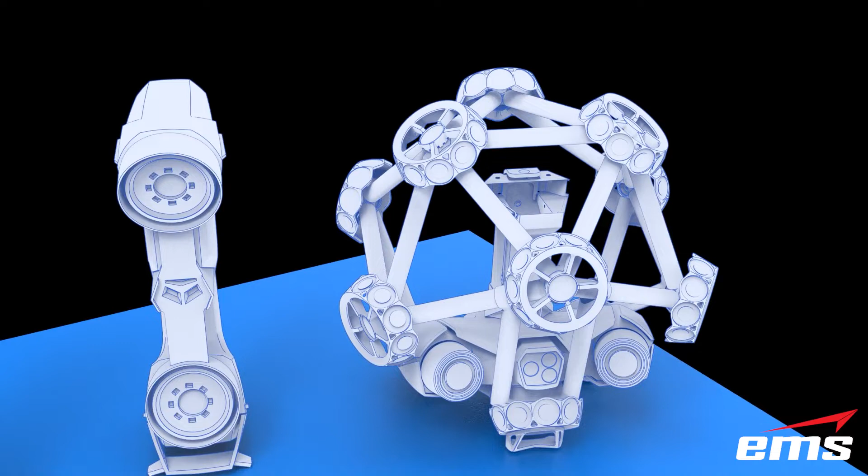In this video, we are going to compare 5 3D scanners from Creaform. As of 2021, this is the current lineup of Creaform's handheld 3D scanners.

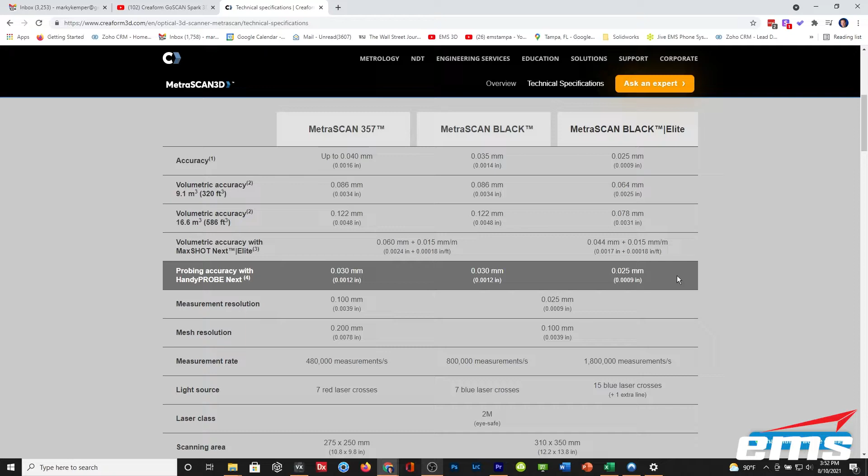The 5 scanners are the Peel 2 3D scanner, the HandySCAN 700, the GoSCAN Spark, the HandySCAN Black, and finally, the MetraSCAN Black. Now, something to mention is some of these scanners have additional models that we are not going to discuss today. For example, the MetraSCAN has the Black Elite and the 357. We are testing the top-of-the-line system for each model.

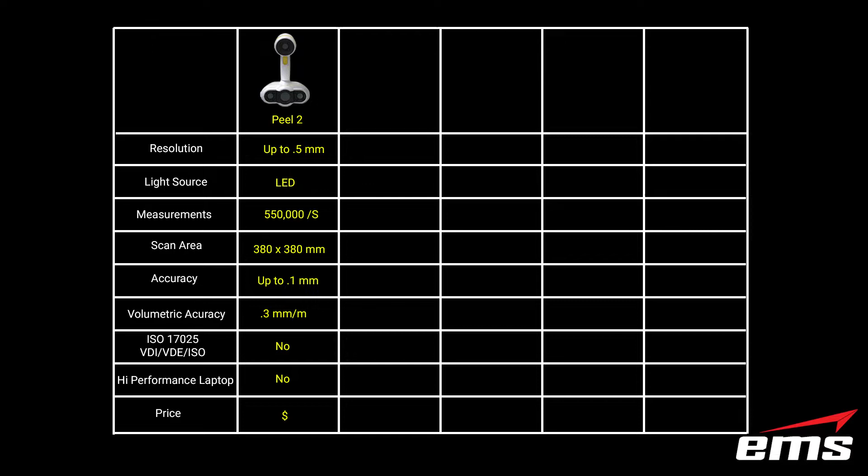Next up is, is a high-performance laptop required? No, you still want a good laptop, but some of these scanners have very specific graphics cards, processors that you need to use. Basically we're saying you don't need that here. You still want a good computer, but it doesn't need to be very specific, very high-end. And as far as price, we're not going to get into specific pricing because it varies from country to country and prices can change over time. So let's just say that this is the most affordable in the shootout here, and we've kind of put them in order by price, so that should give you some ideas. So that's the Peel 2.

Now next up is the HandySCAN 700. Its resolution, again mesh density, will go down to 0.2 millimeters. And this gets into the feature size, how small of a feature the scanner can pick up and resolve, as I've mentioned earlier.

The light source is red laser lights, and the HandySCAN 700 has 14 laser lines in a cross-hatch pattern. It also has a single line mode to get into fine detail, small holes, and narrow crevices. Again, if you want to see a lot of detail on that, go watch the demo videos.

The measurement rate is a little bit less at 480,000 points per second, and the scan area is slightly smaller at 275 by 250 millimeters. The accuracy is 0.03, or 30 microns. Again, that's your point-to-point accuracy in a given area. Your volumetric accuracy, as you scan something larger, is 60 microns over a meter. That's your stacking error.

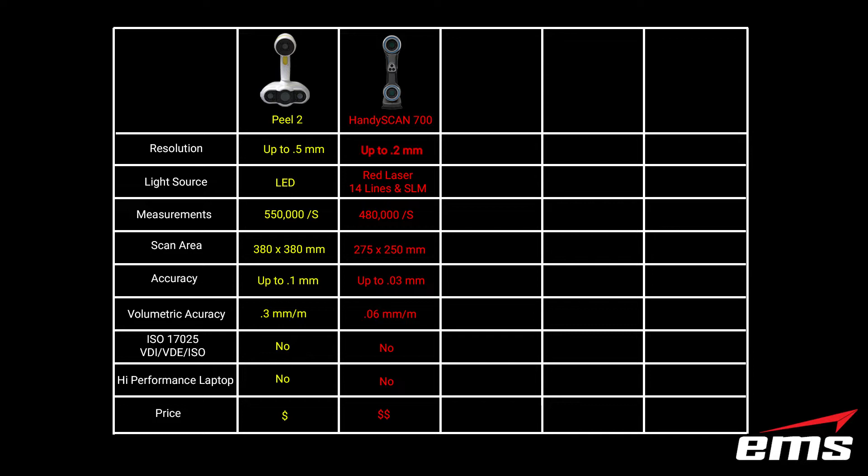It is not ISO certified, nor VDI VDE. It doesn't require a high-end laptop, and is kind of next up in the price point above the Peel.

Moving on, we have the GoSCAN Spark. That'll do a resolution up to 0.2 millimeters. This is an LED, structured light pattern, and it projects out 99 lines from an LED light. It has a very high scanning measurement amount, which is 1.5 million points per second, and it has a really large scanning area of 390 by 390 millimeters.

The accuracy can be up to 0.05 millimeters, with a stacking error of 0.15 millimeters per meter. It is not ISO certified. It does require the high performance laptop.

The next three scanners, because of the amount of scan data they are capturing, require this high performance laptop. Specifically, there's an NVIDIA graphics card that you absolutely must have, and then you need a really good i7 or preferably an i9 processor, and a fast solid state hard drive, because we're talking about files that can be 5, 10 gigabytes in size or greater. I'll point out the Peel 2 and the GoSCAN Spark have the ability to scan in color, and that will just add even larger file size and more computation required. It's next up in the pricing scheme here.

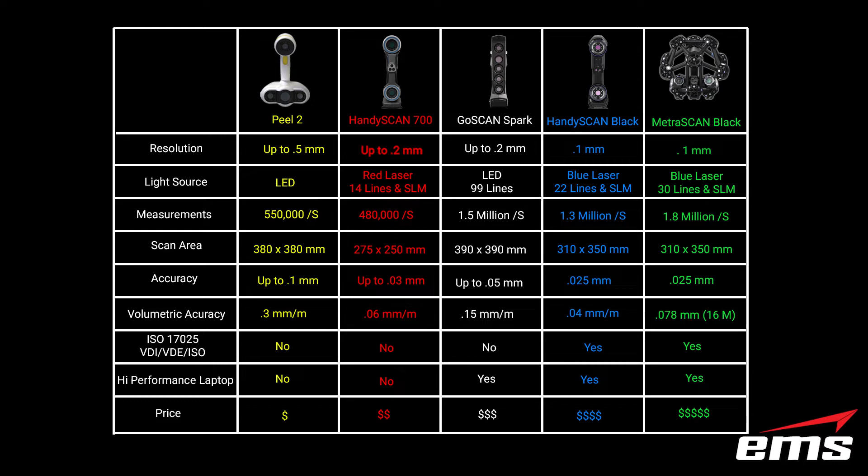So now we're going to get into more specifics with each one of the scanners. And as we mentioned, we're going to talk about the applications, the pros and cons, and then finally, who is this scanner for? And we will start with the Peel 2 3D scanner.

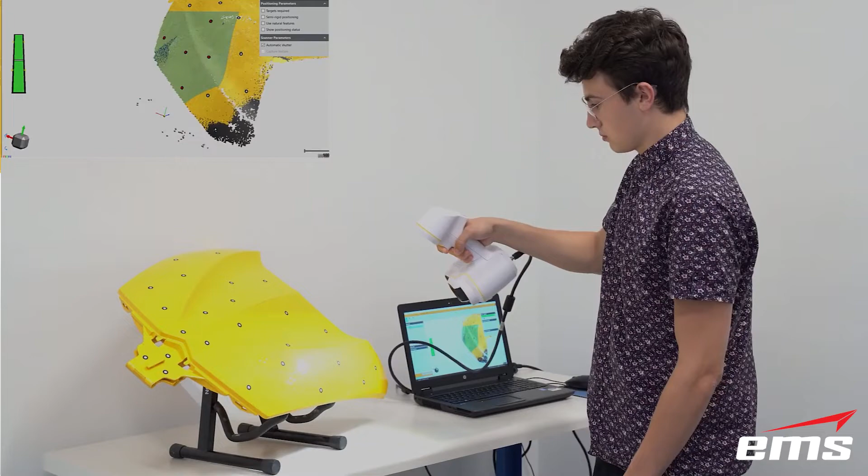So the Peel 2 3D scanner is the entry-level, what a lot of people like to call prosumer 3D scanner. Being a structured light 3D scanner with geometry tracking, it can work with and without targets. And if you don't know what targets are, go watch some of our other videos, but they're basically little stickers you put on a part that help the scanner track. Because this will use geometry as well as targets, it makes it a little bit easier for people to use. And it's really good for things like product and industrial design, consumer products, sculpture and artifact, prosthetics, education, and more.

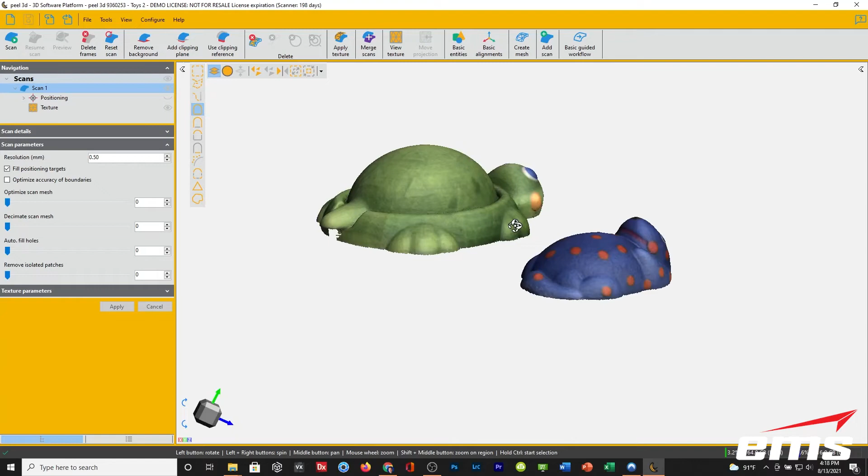It has a reasonably good accuracy and good detail, and it's really easy to use. Also, there are some optional CAD modules that allow you to do some basic mesh editing, feature extraction, and auto surfacing.

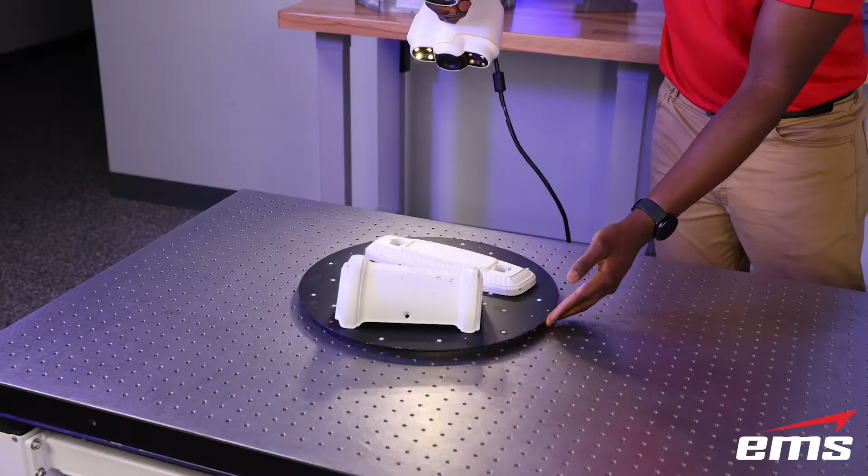So really the pros and cons of this system are: the pros, it's easy to use. It's pretty straightforward, comes with some great tutorials and online videos, and really designed to help somebody get going that's never done 3D scanning before. It has pretty good accuracy and detail given its price point. In this price area, it's definitely probably one of the best 3D scanners, not only just the quality of the scan, but the level of support, the documentation, everything.

And it also captures color. Some people want to be able to capture color for things like animation and virtual reality and things like that.

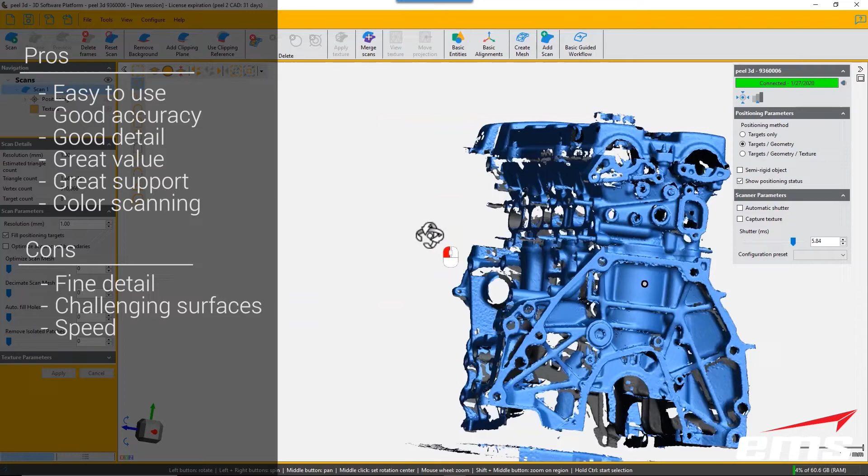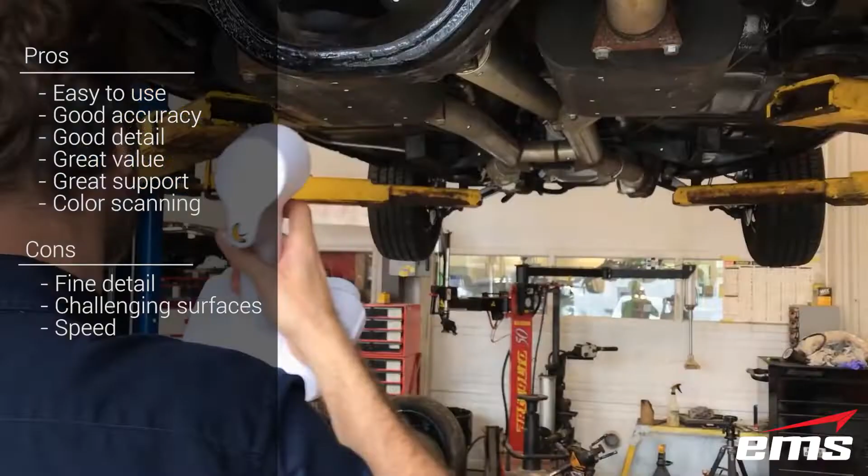Now, some of the cons of this system is it will struggle on small parts or parts with a lot of detail. It's just at that 0.5 millimeter resolution, you're just not going to get into some very tight, small, fine features with this scanner. And some surface types will be challenging. Things that are very shiny, very dark, very reflective, transparent will be a challenge with this scanner unless you do some type of surface treatment, which would be like tape, or there's different sprays out there you can spray on and then wipe off - some of them even evaporate over time. And the speed of the scanner is not as good as some of the other scanners, just because of maybe some of the challenging surface types that it has to work with.

So, who is this scanner for? It's really for someone on a budget or really just getting started with 3D scanning. They don't want to break the bank on a more professional, high-end system. It might be a small entrepreneur who's just getting started. It's also great for schools, universities, medical professionals where maybe they're only using it part-time to do some things. There are some great educational bundles with software and hardware and ongoing support that you can get with this scanner. So it's a great entry-level scanner, but yet it's still a professional grade system.

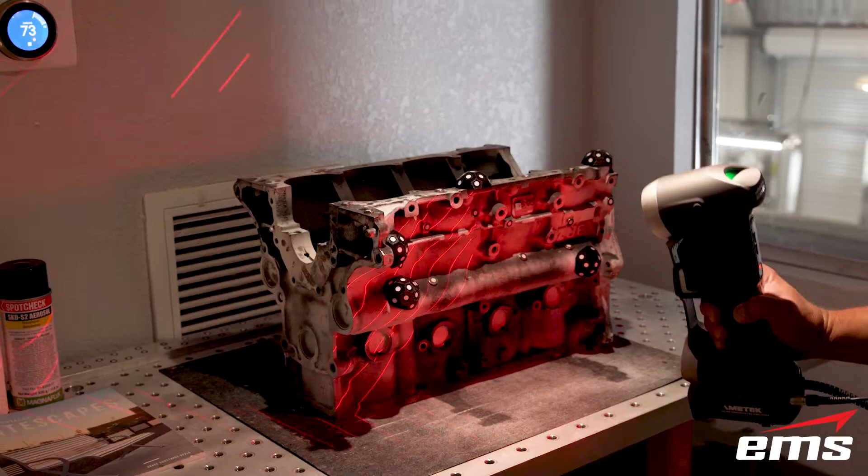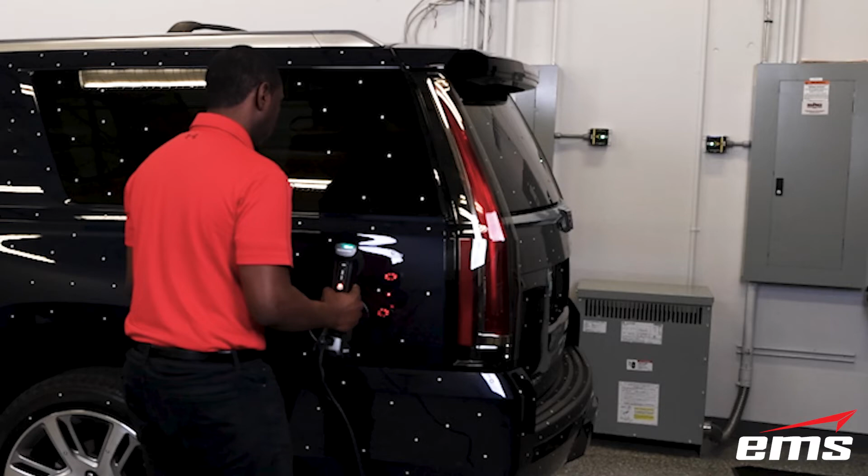Okay, so next up is the HandySCAN 700. This scanner is the entry-level laser-based 3D scanner from Creaform. One of the most popular 3D scanners of all time, the HandySCAN 700 is a great scanner. Laser-based 3D scanners do a better job on demanding surface types and offer higher detail on fine features.

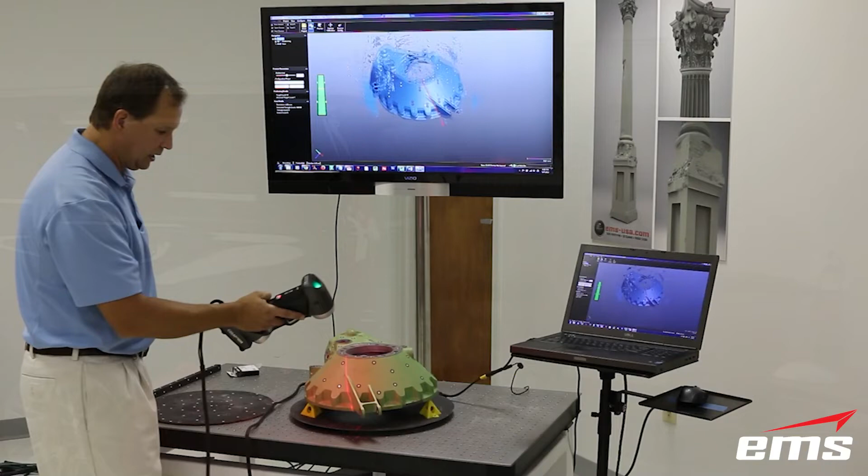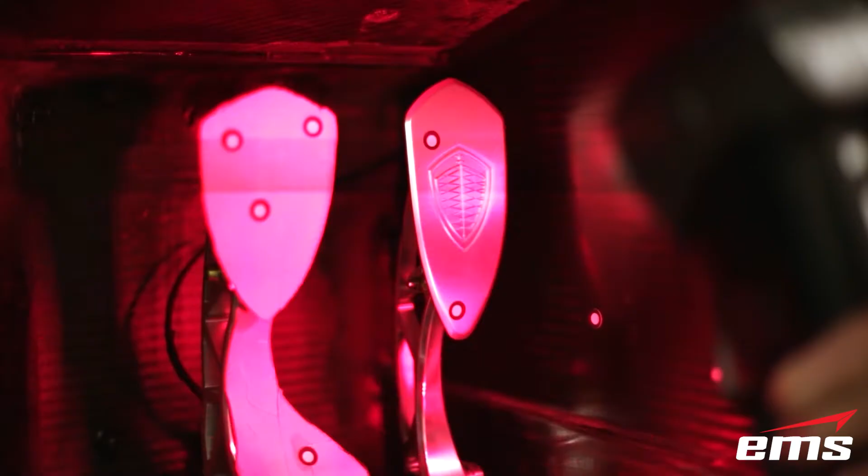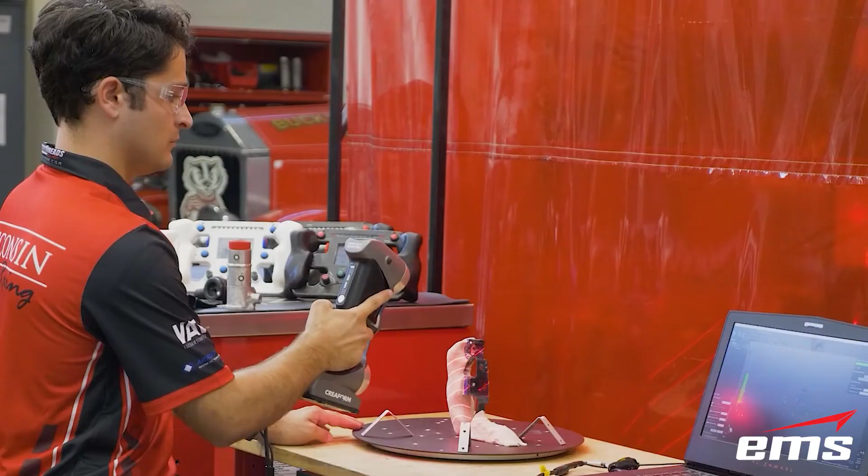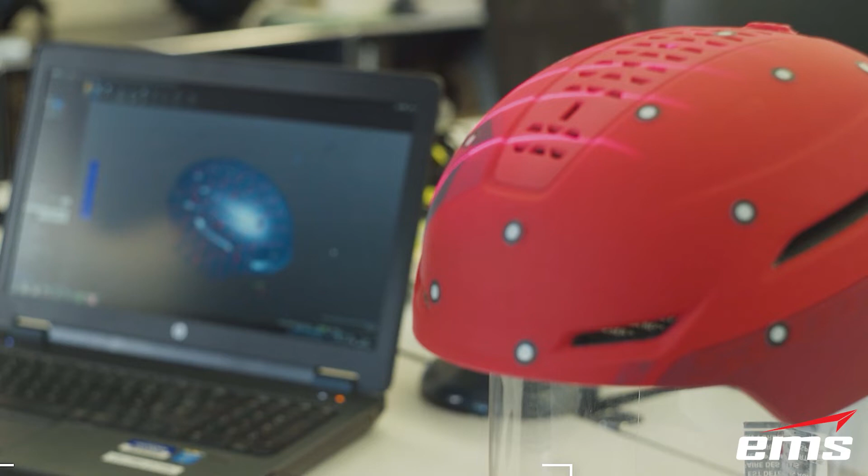The single line mode really lets you get into some small holes and narrow features such as ribs and small cavities. The HandySCAN 700 is an extremely portable yet powerful 3D scanner. Its small size makes it great for getting into tight areas, such as inside an engine bay or an industrial valve. Like the peel 3D scanner, it's extremely easy to use. It also features onboard smart buttons that let you change things like laser power or adjust your view while you are 3D scanning. It's a great balance of resolution, speed, accuracy, price, and the ability to scan challenging surface types in one product.

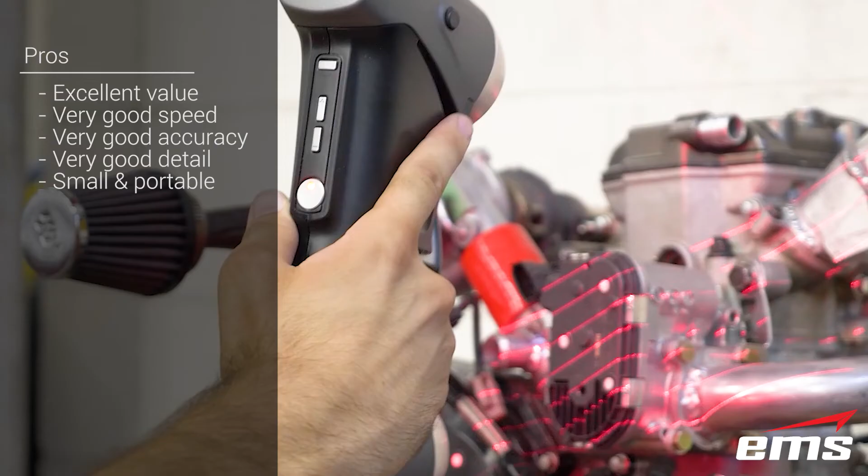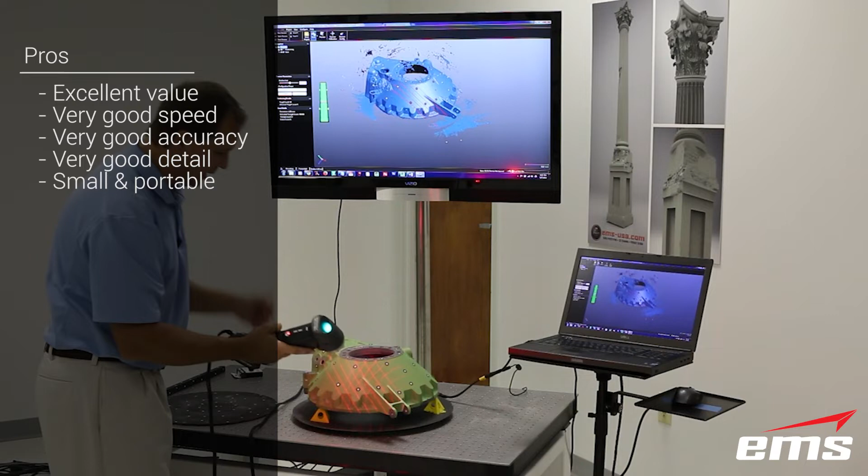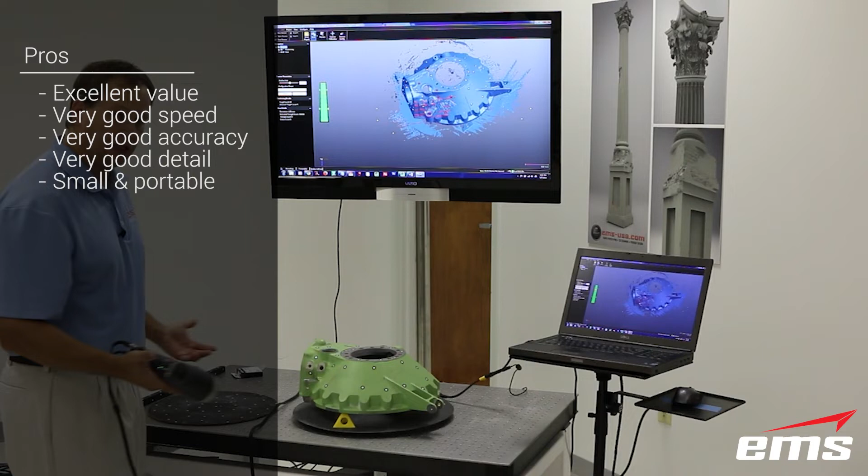So let's take a look at the pros and cons of the HandySCAN 700. One of the pros is it's just an excellent value for a laser-based 3D scanner. It offers very good speed, accuracy, and detail, especially for its price point. It is small and very portable. Some of the cons: it's not as accurate as some of the higher-end 3D scanners, and it is not ISO certified.

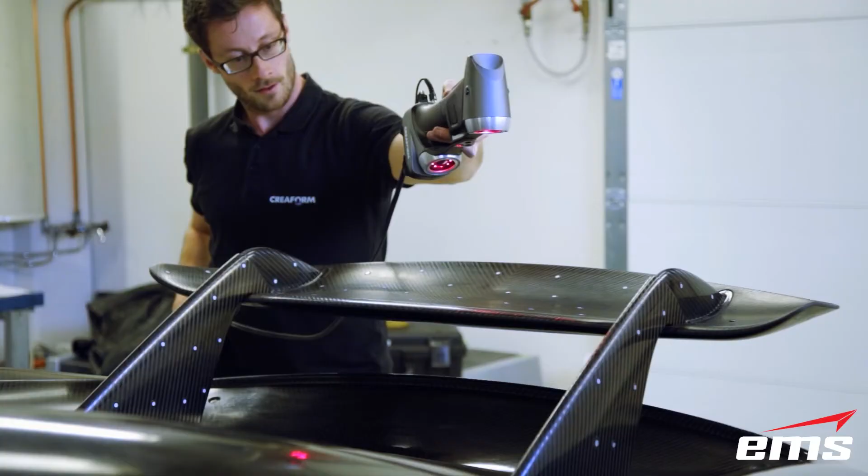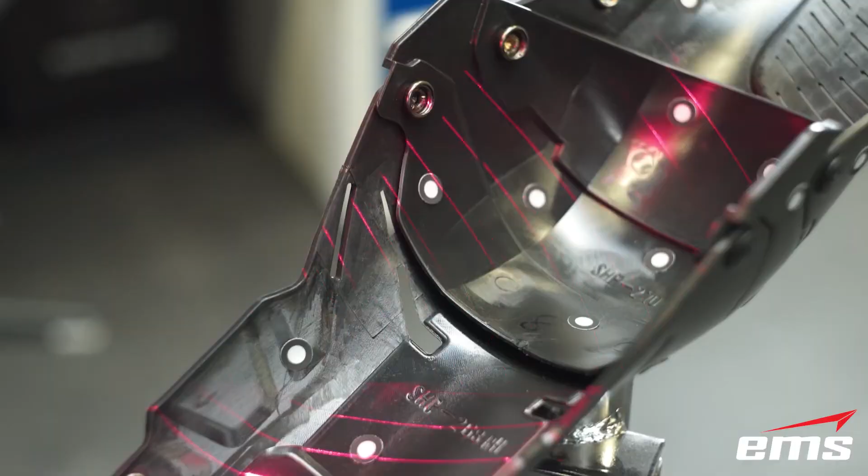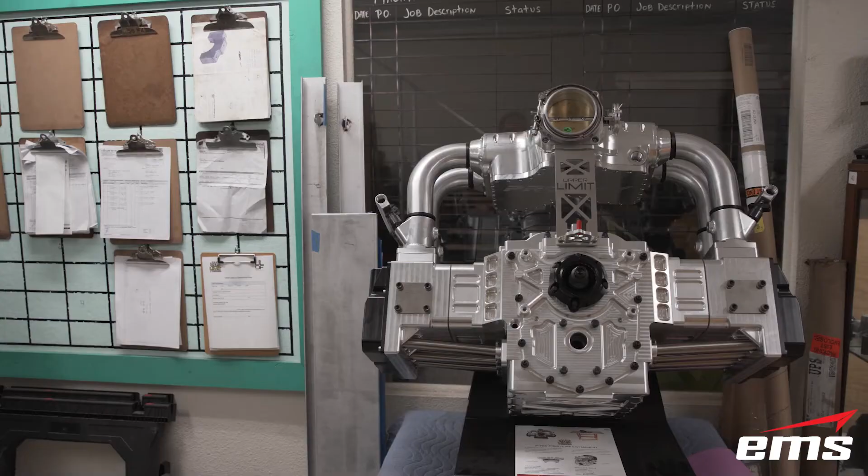So who is the HandySCAN 700 for? This scanner is going to be a great scanner for the industrial professional who is primarily focused on small to medium-sized parts to create CAD models from 3D scan data. In addition, they may be scanning shiny machine parts or darker, dirty industrial parts where the lasers can do a great job. Typical customers are in the aftermarket performance parts industry, consumer products, metal fabrication, replication, automation, and similar industries.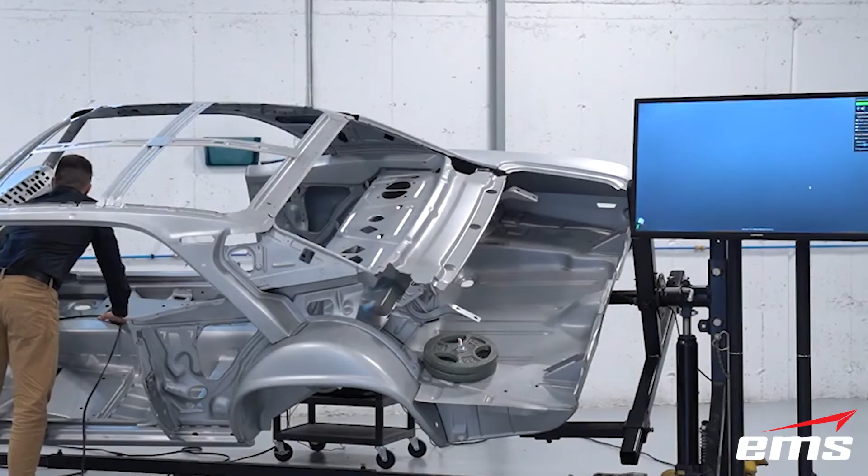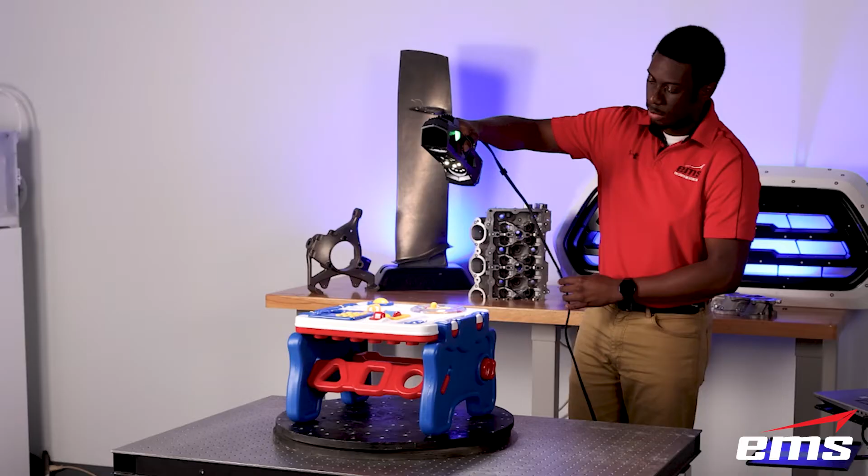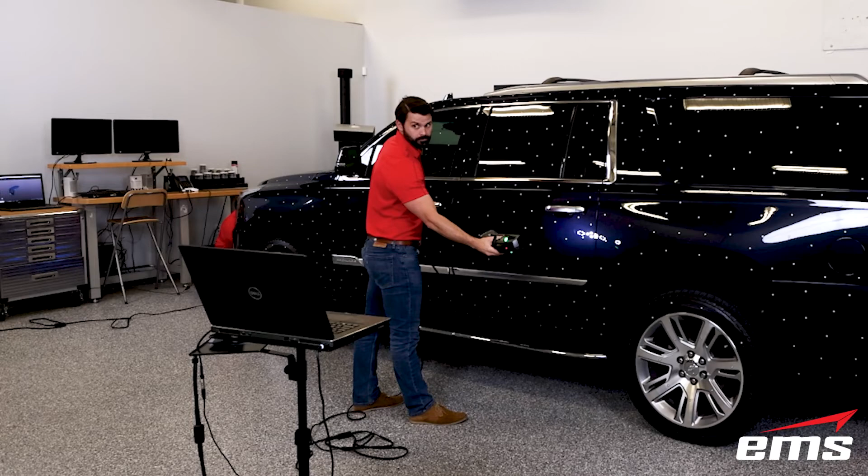The GoSCAN Spark is the latest generation handheld structured light 3D scanner. Using 99 LED lines, it can capture 1.5 million points per second in a large scanning area and depth of field. It also includes improved color capture capabilities and fidelity. It is extremely fast, and although it's not quite as good as laser-based scanners on challenging surface types, it does a very good job on most surface types.

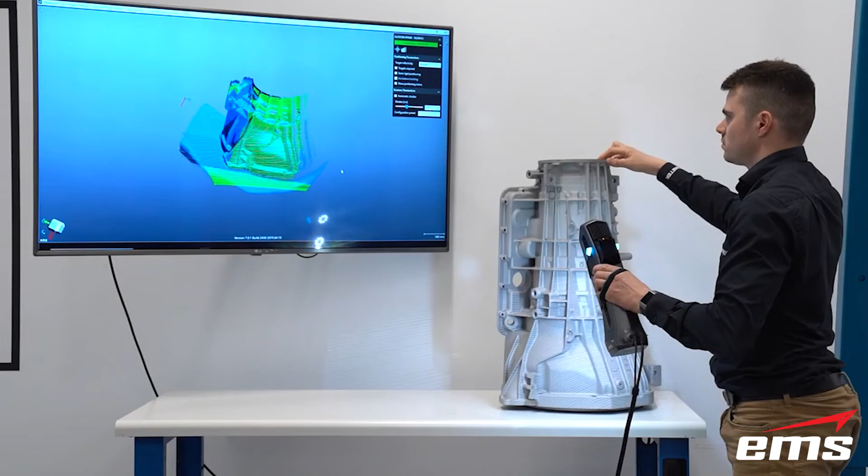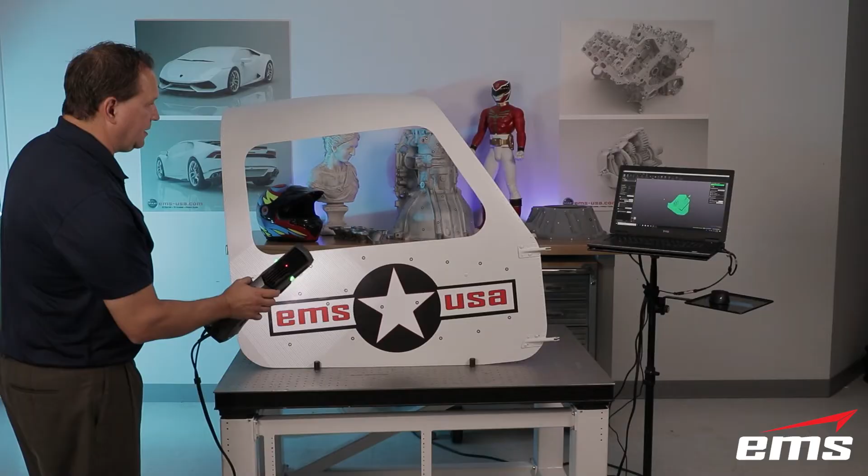Accuracy is very good for its target user. The ability to 3D scan with no targets is also a huge advantage of the GoSCAN Spark. In many cases, you can completely 3D scan a part while other 3D scanners are still applying targets. It is very flexible in how it positions itself in 3D space. It can work with no targets and use the geometry, it can use targets only, or targets and geometry, and it can also use color and texture to position itself. This gives you many options when 3D scanning an object.

So what are the pros of the GoSCAN Spark? It is extremely fast at 3D scanning. It uses few or no targets on most surface types. It has very good resolution and accuracy, and it offers full color 3D scanning. Some of the cons: it is not ISO certified, it will struggle in bright sunlight or challenging surface types, and it does require a high-end laptop.

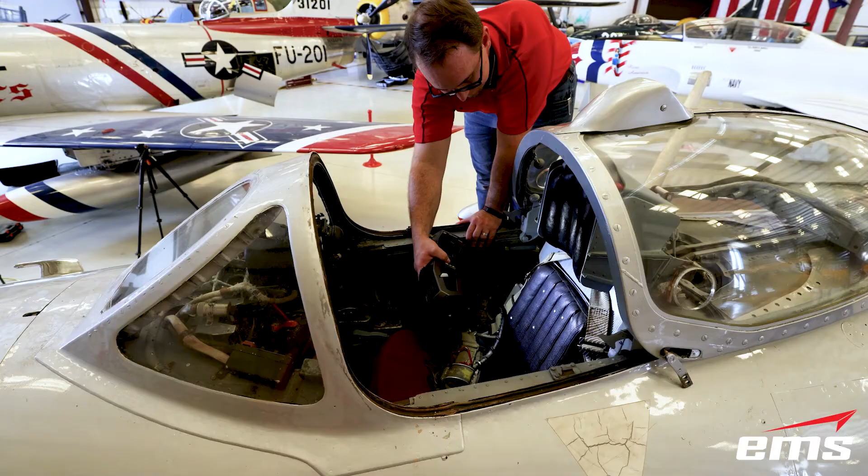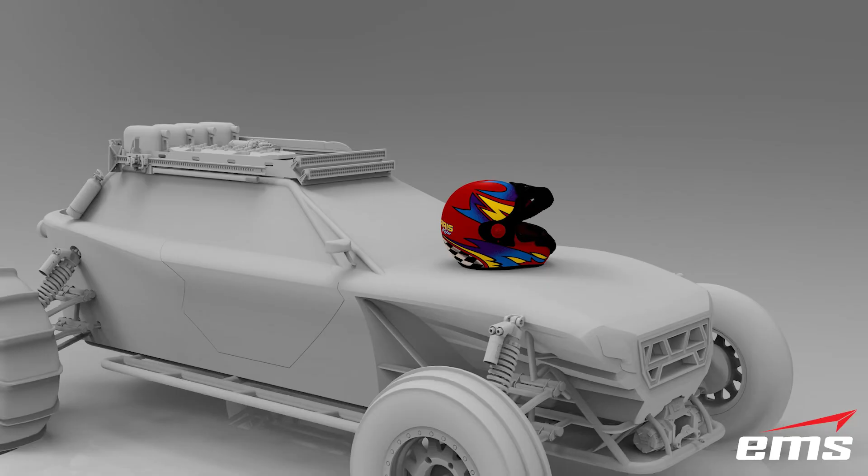Who is it for? Speed is king with the GoSCAN Spark. Customers of this type of scanner are in industries like theming, architectural products, entertainment, animation, art, sculpture, foundries, medical prostheses, pattern making, industrial design, vacuum forming, simulation, and more.

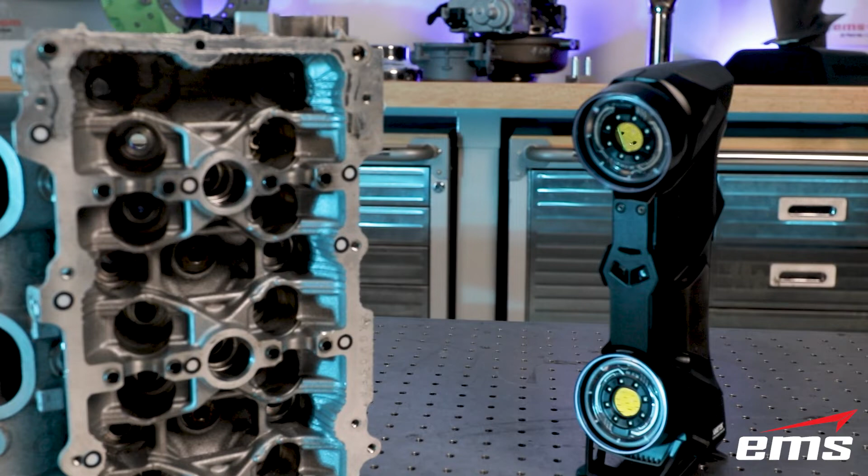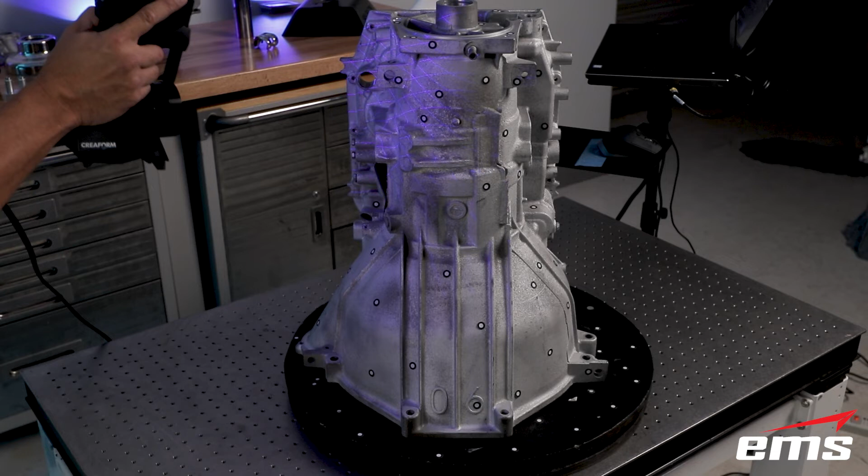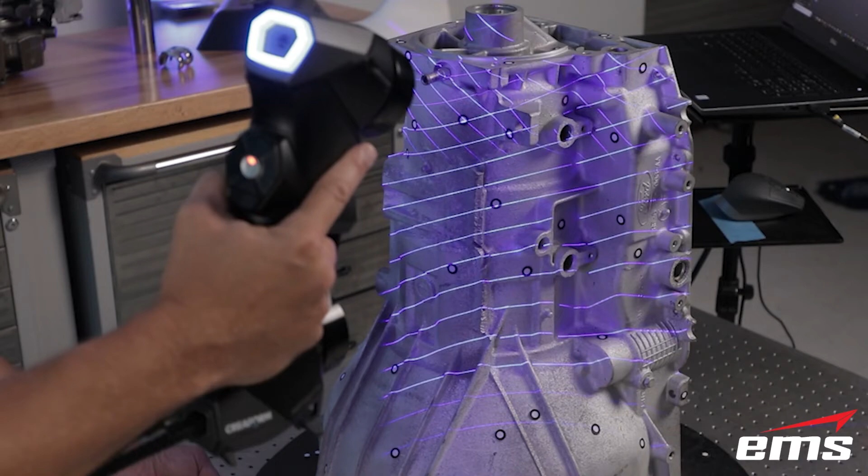The HandySCAN Black is the flagship laser-based, extremely portable 3D scanner from Creaform. It is the only ISO 17025 accredited handheld laser-based 3D scanner on the market. What does that mean? It means the calibration process, accuracy numbers, quality control, product reliability, and performance have gone through rigorous international standards to meet the highest demands of our customers.

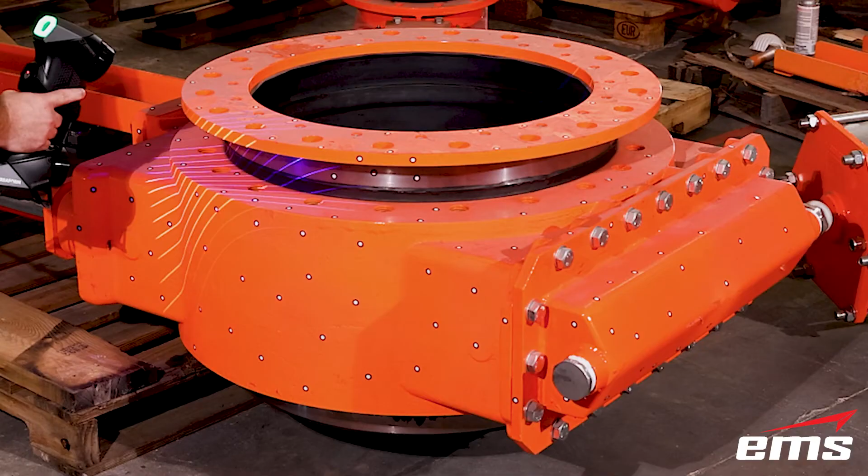With 22 blue laser lines, it can 3D scan very small to very large parts quickly and accurately. It also means it can 3D scan shiny materials like machined aluminum, chrome, and more with no surface treatment. With a resolution down to 0.1 millimeters and an ISO certified accuracy of 0.025 millimeters, no other handheld 3D scanner even comes close. The HandySCAN Black is truly a metrology grade measurement device validated by the VDI VDE measurement standard.

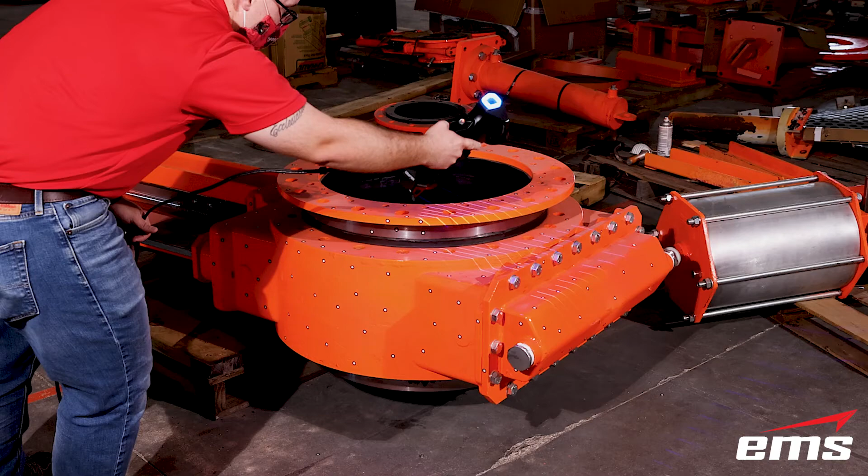The HandySCAN Black gives you the accuracy of ARM-based scanners without all the complexity and size. Forget granite tables and a heavy, bulky arm stand. Just grab the HandySCAN Black and head out to the shop floor and 3D scan and inspect all types of parts quickly and accurately.

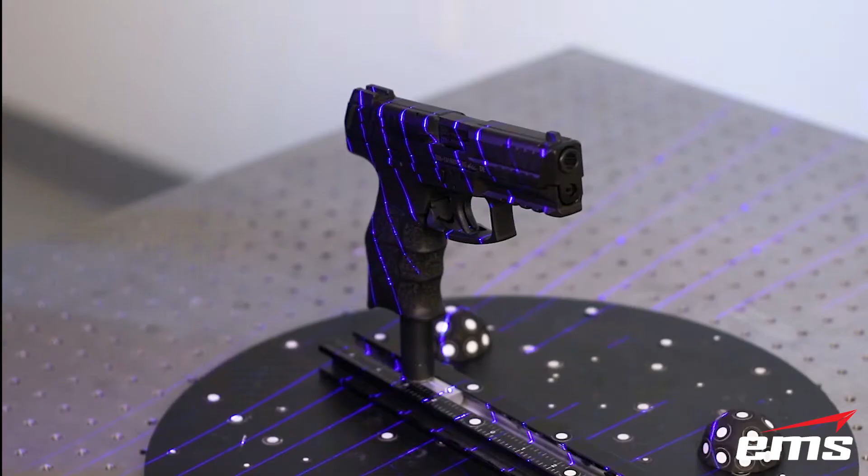So what are the pros and cons of the HandySCAN Black? Well, the pros are it is the most accurate, highest resolution handheld 3D scanner on the market. It is manufactured in an ISO 17025 facility and measured under the VDI VDE standard. It is truly a metrology grade system, and it can 3D scan the most demanding surface types, and it is also extremely fast.

So the only con is it comes at a higher price than other scanners. So who is it for? For those users who want zero compromise in regards to speed, resolution, and accuracy, this is the scanner for you. If you are performing dimensional inspection or have to meet ISO requirements, then the HandySCAN Black is the only choice.

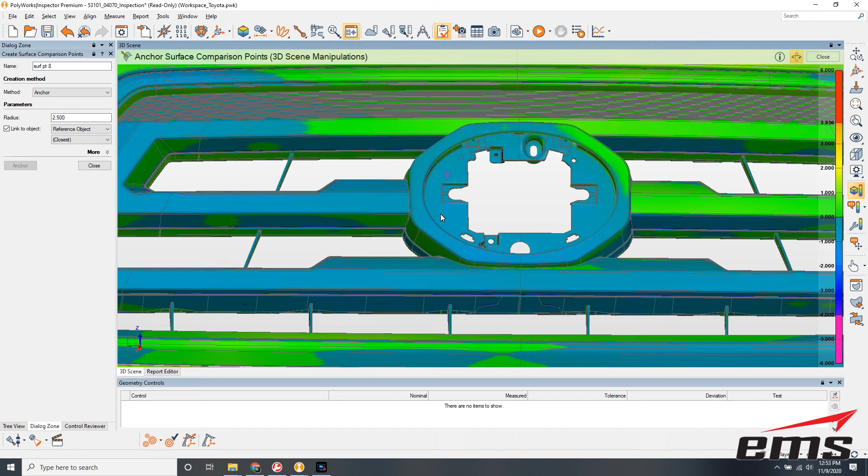It is great for small to large parts, and like all Creaform 3D scanners, can work with the MaxShot photogrammetry system for even higher accuracy on larger parts.

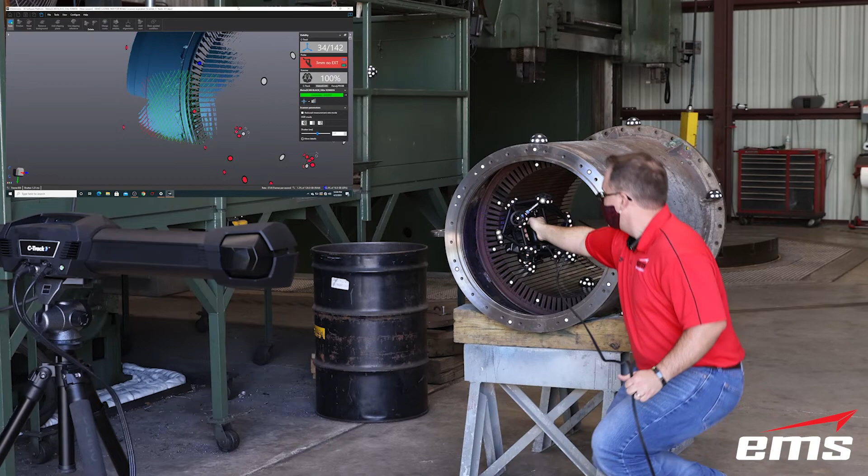The MetraSCAN Black is a very unique 3D scanning and probing system. It is designed as a shop floor 3D scanning and metrology system for medium to large parts. The scanner offers 30 blue laser lines to capture an insane amount of 3D scan data. The probing system allows you to inspect features like holes, planes, slots, thin edges, scribe lines, and more.

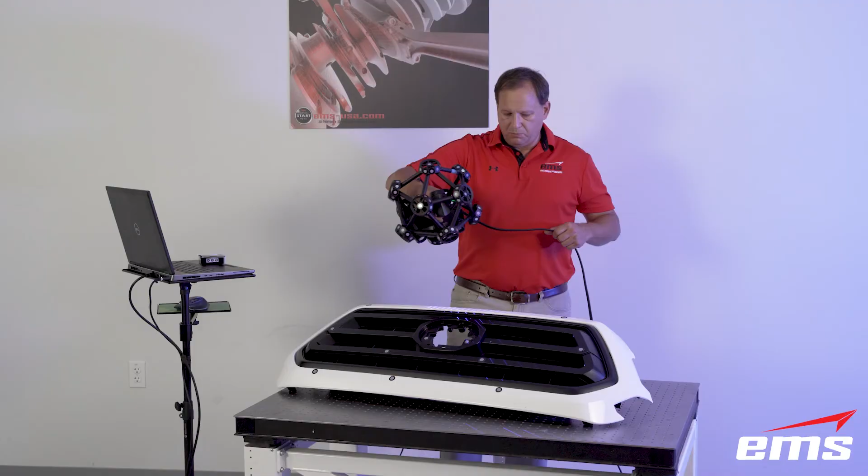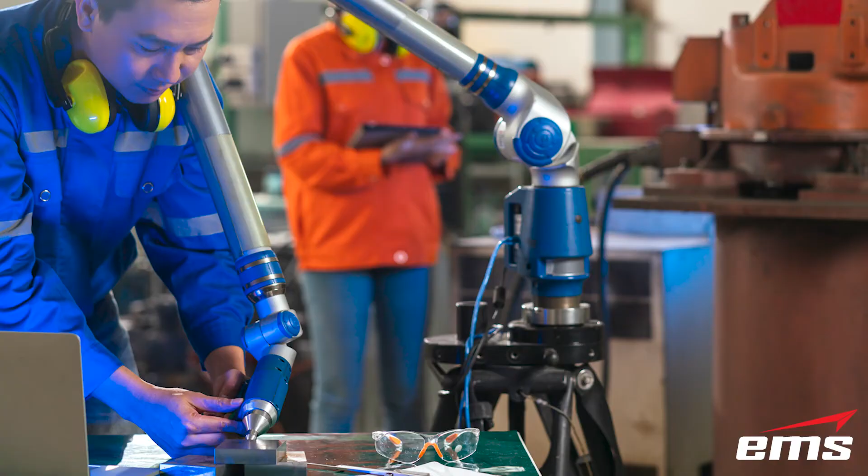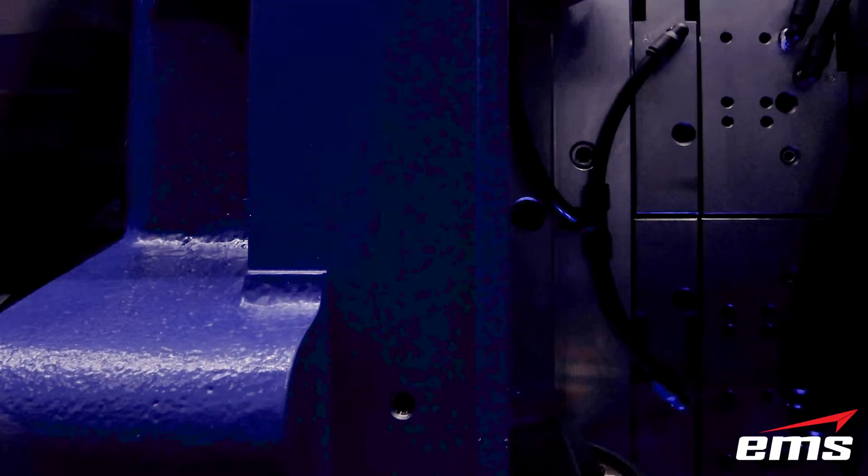With its dynamic referencing system, you can inspect parts on the shop floor even while they are moving around with no loss of accuracy. Don't try this with your tripod-mounted white light scanner or arm-based system. Forklifts, stamping dies, molding machines, automation equipment, and other things will drive their accuracy out the window in a real-world shop floor situation.

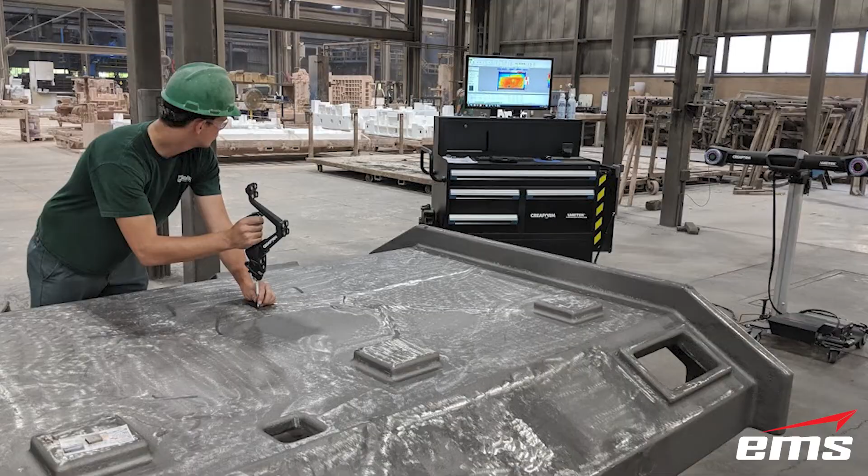Users don't want to take their parts to a lab and measure them anymore. They want to do it on the shop floor, and the MetraSCAN is the only system that can accurately do it under harsh environmental conditions.

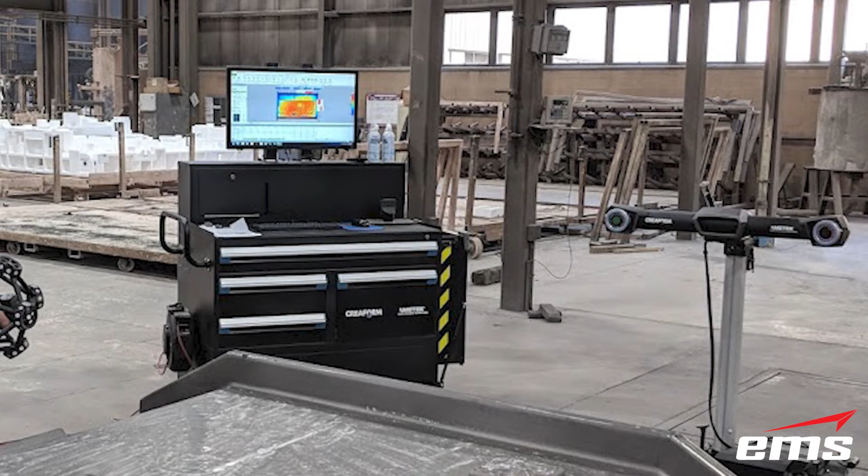With its 16-meter single scanning volume, it can hold a very tight tolerance evenly throughout that volume. No leapfrogging or photogrammetry systems are required like the competition to expand their volumes. Simply use the dynamic referencing system to automatically expand the volume for very large parts.

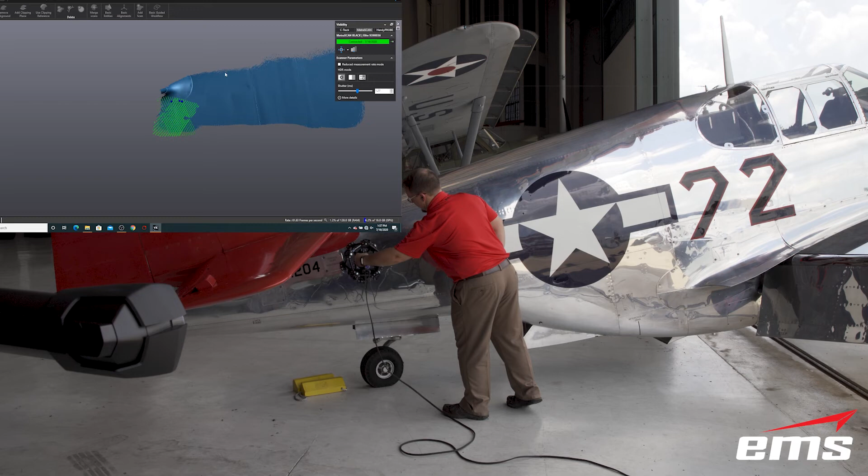The MetraSCAN can also perform auto calibration adjustments as the temperature changes throughout the day, so there is no need to recalibrate.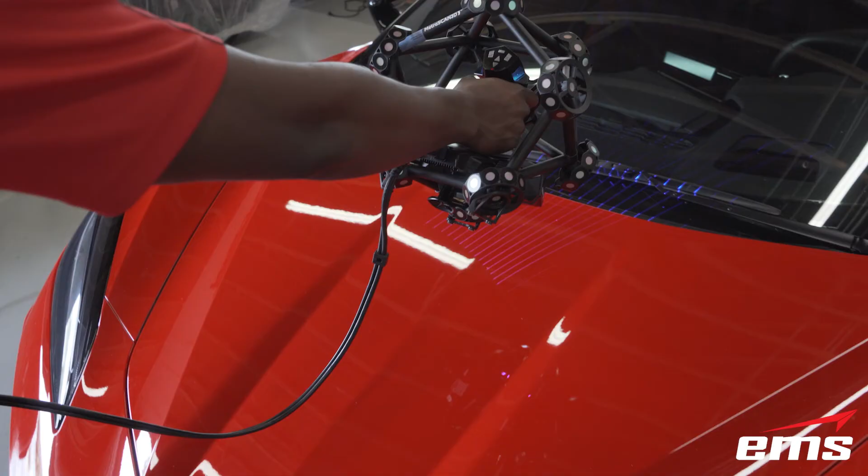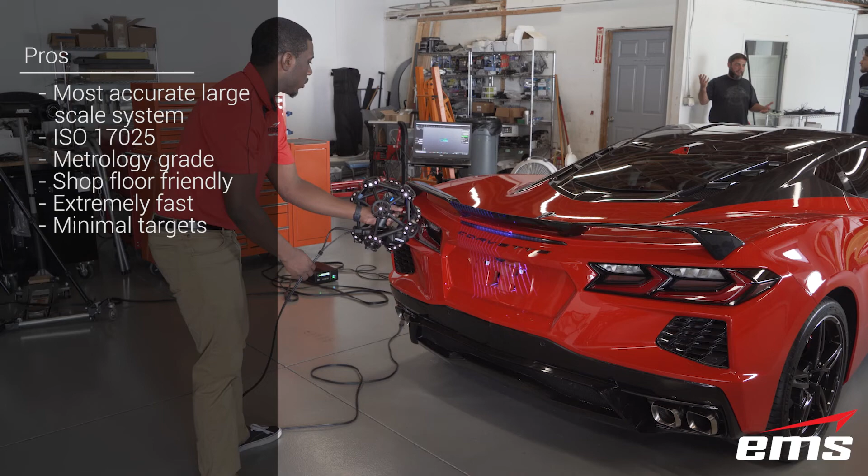So what are the pros and cons of the MetraSCAN system? It is the most accurate, highest resolution, large-scale scanning system on the market. It is manufactured in an ISO 17025 facility, and like the HandySCAN Black, has been measured to the VDI VDE standard. It is truly metrology-grade equipment.

It's built for the shop floor. Vibration and movement don't affect accuracy. It is extremely fast, and it only requires a handful of targets on most parts. The cons: it is the highest priced Creaform system in this test, and it is not as portable as other Creaform 3D scanners.

So who is this scanner for? Customers who frequently 3D scan medium to large objects or want to perform shop floor inspection, the MetraSCAN is the obvious choice. If you need to do both 3D scanning and probing, the MetraSCAN has many advantages over traditional CMMs, arm-based systems, and tripod-mounted structured light systems.

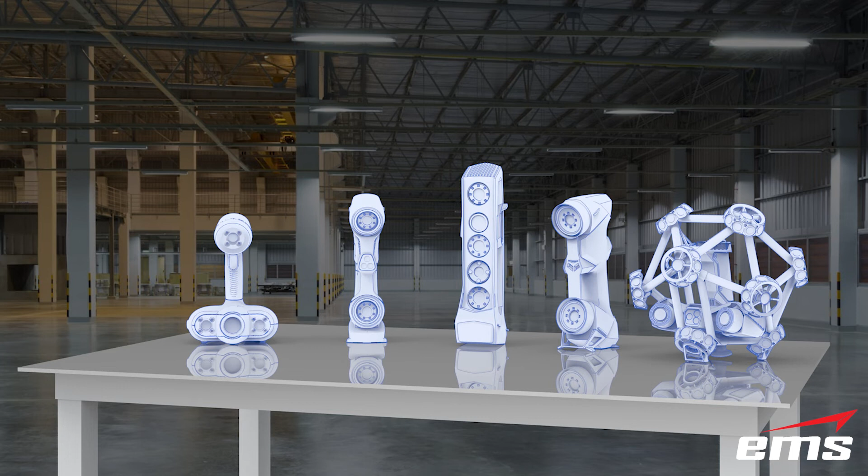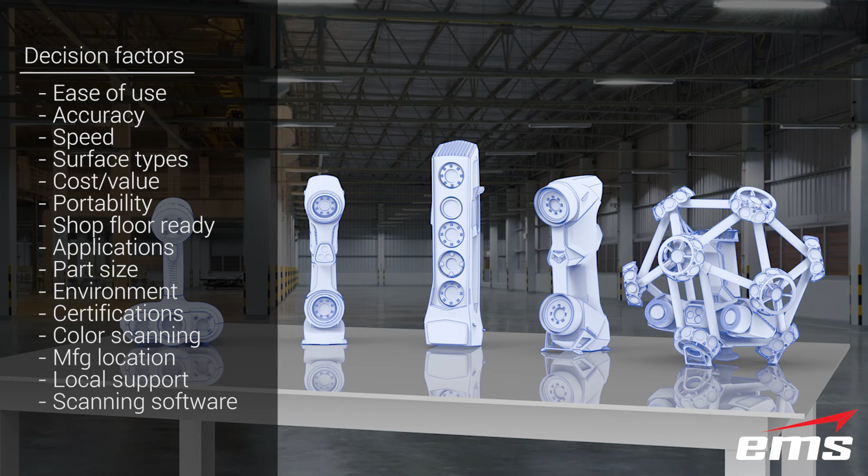So in conclusion, which 3D scanner should you consider if you are in the market for a system? Well, many factors should be considered, and my suggestion would be to order them based on importance. Things you should factor in your decision should be things like ease of use, accuracy, speed, surface type scanning ability, cost or value, portability, shop floor friendliness.

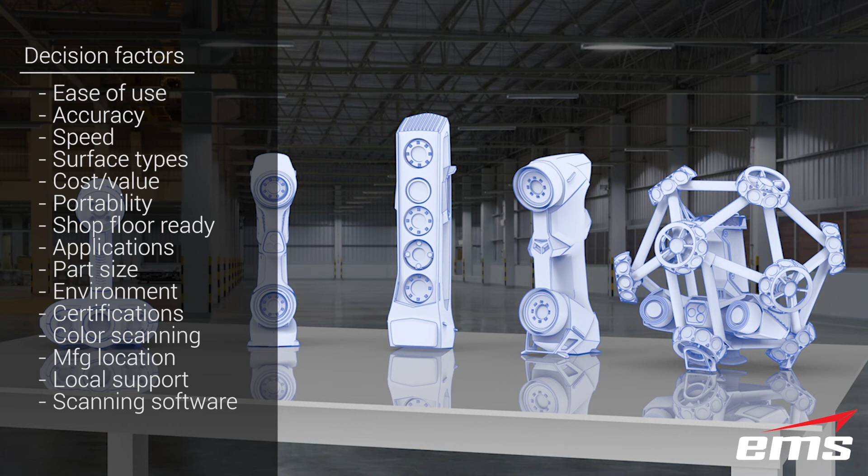Applications, part size, environment, which would be things like shop floor, outside, tight spaces, areas of vibration and movement, ISO, VDI, VDE certification, color and texture, manufacturer location, local service and support, and integrated software as far as features and quality. Those are just some of the things you should consider.